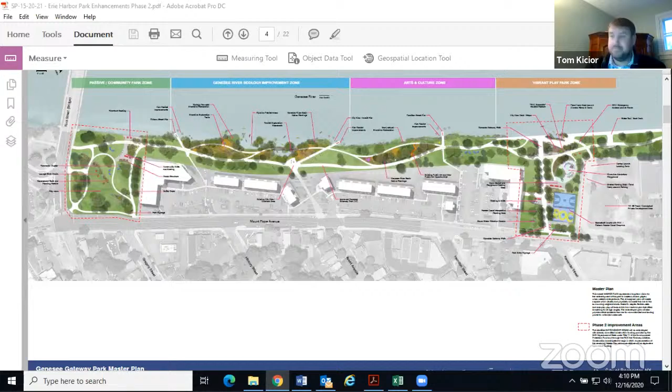So we will hand it over to Jeff to give us a background of the project, then go into questions and answers with the PRC committee. Sure, thanks Tom. The image on the screen is the master plan developed as part of phase 2. I'll step back and explain why it's phase 2. Phase 1 was completed in 2014 in conjunction with the Erie Harbor Apartments redevelopment.

The private piece of that development established 3 connections between Mount Hope Avenue and the Genesee Riverway Trail and the waterfront, basically to provide greater connectivity to the neighborhoods to the east, to the waterfront. Across from Averill Avenue is the major connection point, but there are smaller connections at Hamlin and Hickory Streets. All are public access points, open to the public.

The project also included some streetscape improvements along the frontage of Mount Hope Avenue and some public art installations. That was completed in 2014. As part of that effort, an overall master plan for the site was completed, and then the 3 connection points were established, designed and built as part of that master plan.

Phase 2 is funded by the Department of State and the ROC the Riverway Initiative. As part of our effort, our initial design task was to take another look at the master plan with fresh eyes. We've had a project advisory committee that will actually be meeting for the 6th time this afternoon at 6 o'clock.

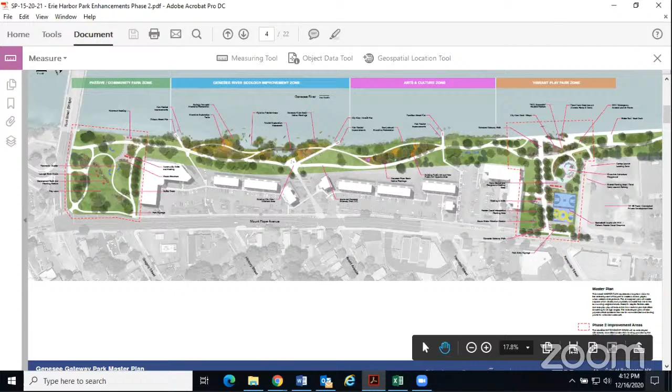The south side is largely a passive green space, kind of a transient space, not a lot of activity in it.

Our goal is to reestablish trail connections. Both this site and the northern site have had significant environmental issues that have been remediated over the years through our Department of Environmental Quality. Stantec had a part in a lot of that work through their environmental unit as well, so they had pretty good familiarity with it.

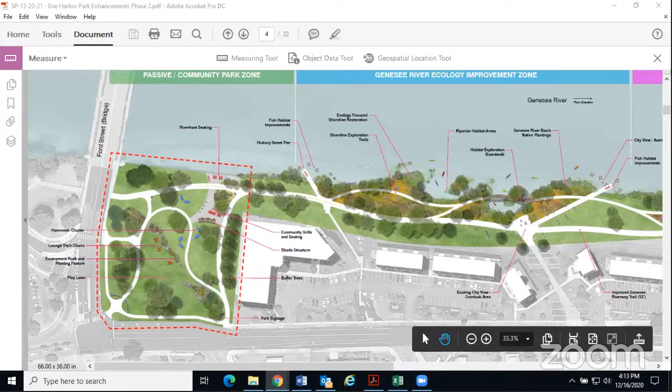Unfortunately, those environmental remediation projects often don't have restoration funds, so the sites were left in fairly rough shape, with discontinuous paths and some amenities that weren't restored. That's largely the focus of this project, to restore those 2 sites to fully functional park spaces. The south site is largely passive, reestablishing some connections that were disrupted by the environmental projects.

The path system you see, we're going to be restoring, but not doing the community grills and seating area at this time — that'll be a future phase. Same with the shade structures, but we will establish the path system, put in some benches and grills to activate the space. From what we've heard from the public, that's desired as a minimal amenity, and also doing some vegetation management — there'll be some tree removals, but mostly plantings to buffer and screen and protect some view sheds.

The rock escarpments you see winding through the site, we will not be doing at this time. It's a budget issue, and a future phase would look at addressing those kinds of things.

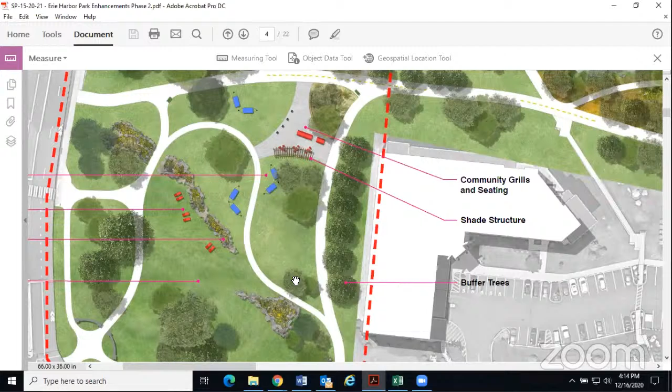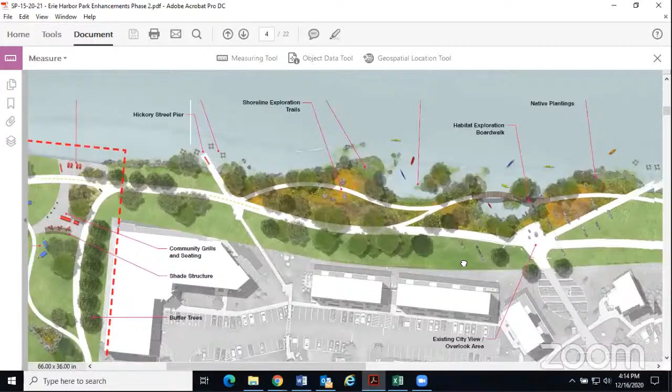The river trail we're showing here has some pretty significant changes proposed in the master plan between the north and south sites that we will not be doing. That's a long-term vision that will depend on future funding for design and construction.

Obviously the biggest piece you see there is the naturalized shoreline. It's a pretty big change, and would be a pretty significant hurdle to permit, but a lot of other communities have done it on their waterfronts. We think it's feasible and it would be a good option. The west side is doing some wall removal, not quite naturalization — they're still maintaining a wall — but it'll be interesting to see how that works out, and might lead to some direction on this naturalization here.

So Tom, if you can go to the north side.

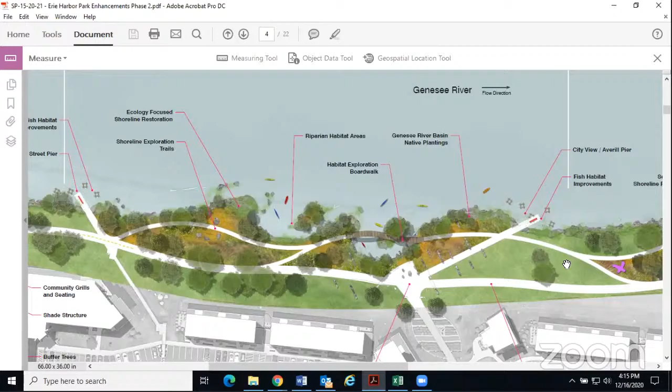The north side is largely the active area of the park, most accessible from the neighborhood. A big source of use is the Hamilton Tower directly adjacent, and this is where the majority of the active use amenities are now. There's an existing playground and basketball court that we propose to remove and replace.

We worked pretty significantly with the Southwedge and their farmers market group to make sure we have accommodations for their future and continued use of the site after construction. That central spine is basically the area where they can set up tents and tables — it's fairly wide to accommodate those uses while still allowing pedestrian access through. We also want to provide direct connectivity from Mount Hope to the river.

The playground is all new, kind of custom designed. We're still working toward feedback from the neighborhood — we'll get more of that tonight and at our final public meeting, but we're pretty close on that.

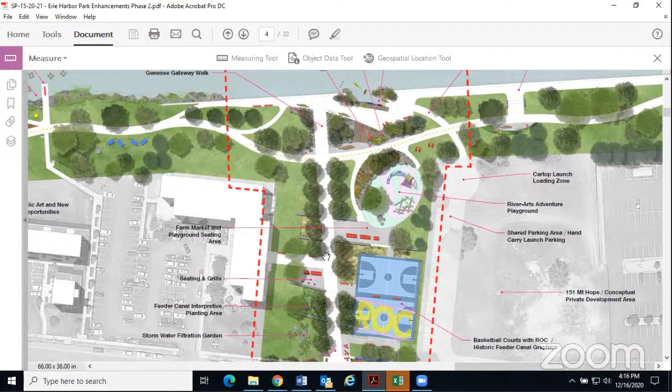The basketball courts — this plan is showing 2 courts, but we don't have funding for both in this phase, so we'll do 1 court. There'll be room for a future court later.

Along the frontage along Mount Hope, there's a sign wall and park entry signage — you can see that blue line running north-south. If you're familiar with the site, there are 3 large star-shaped concrete towers, a remnant of the 1970s design, the last time this was really updated.

Those will be coming out.

One thing we heard throughout all the public input is that people don't recognize this as public space. It kind of reads as Erie Harbor or Hamilton Tower space. So we're trying to make it more prominent that it is park space.

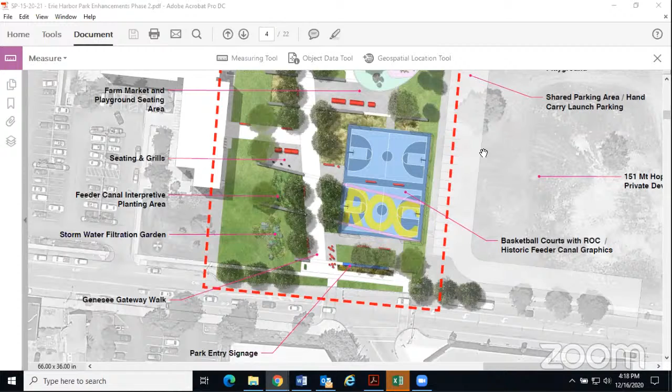Part of that is direct signage on Mount Hope Avenue to identify it as a city asset. We're also proposing some boundary markers along the length of the boundary between the park and the Erie Harbor Apartments to set the boundary, with random placement of stones and some marking piers at the entryways at the three fingers of public access, to demarcate that boundary zone.

We heard repeatedly that people really weren't comfortable stepping off the trail because they thought it was private property of the Erie Harbor Apartments. So we're trying to change that thought process and allow the full park space to be used.

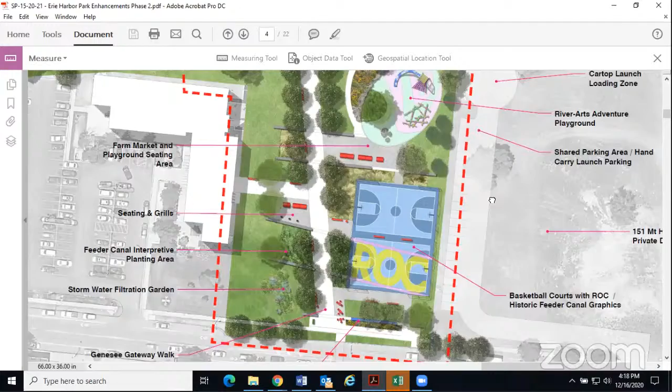The final piece, largely funded by the ROC the Riverway initiative, is the hand-carried boat launch along the river wall. When the East River Wall was rebuilt some years ago, there was a floating dock put in, but it lasted about a year before it was hammered by floating logs and debris, and hasn't been in since.

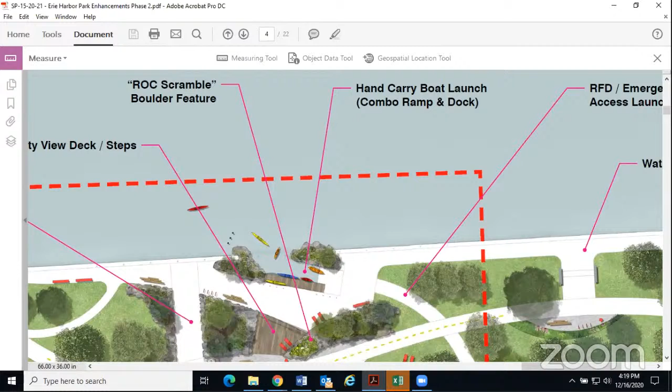So we've worked with our waterfront specialist through Stantec to design a more sustainable hand-carried boat launch that's a ramp down in. Instead of protruding into the river or putting a floating dock in the river, this cuts into the river wall and creates an embayment with a sloped ramp down, at about a 2 to 3 foot water depth.

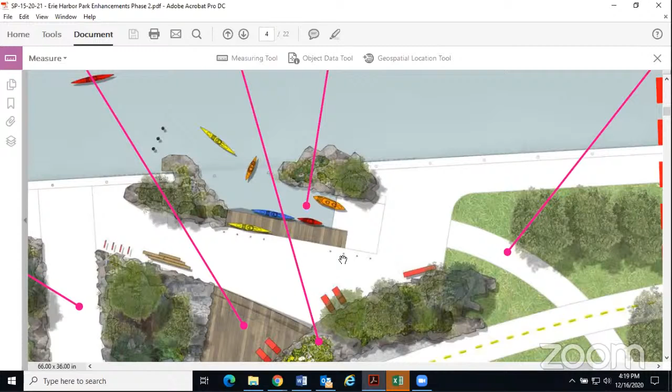So people can walk their canoes and kayaks down in. There'll also be a parallel walk space, that gray area you can see, that you could walk along. If you're more comfortable getting into your canoe off of a dock, you can do it that way, with direct access into the water.

We've also coordinated with the Rochester Fire Department. They have needs for emergency access for their trailered floating boat to get into the water, and right now they don't have access. They've told us stories about having to lower it over the wall on the west side, finding a place without trees, or going over the railing on this side.

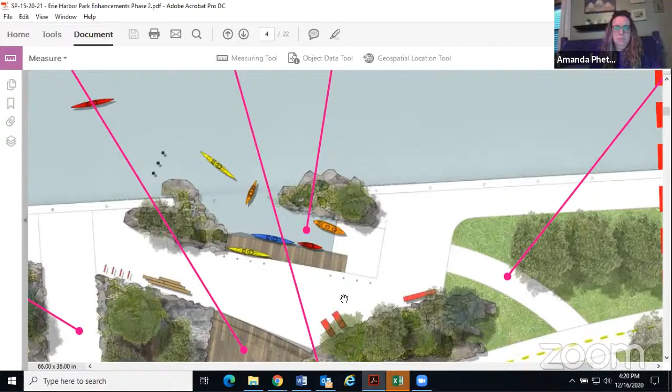So we're trying to accommodate access for them where they can back down on this trail and access this dock to launch their craft in the water. As part of ROC the Riverway, we're trying to get much more canoe and kayak access and use on this stretch of the river south of downtown, and it'll be critical to make sure we have that emergency access.

It's also good to note that'll be an ADA accessible feature as well. The area next to the launch, the gray area, is a good way for folks to launch in from an accessible standpoint if they need assistance.

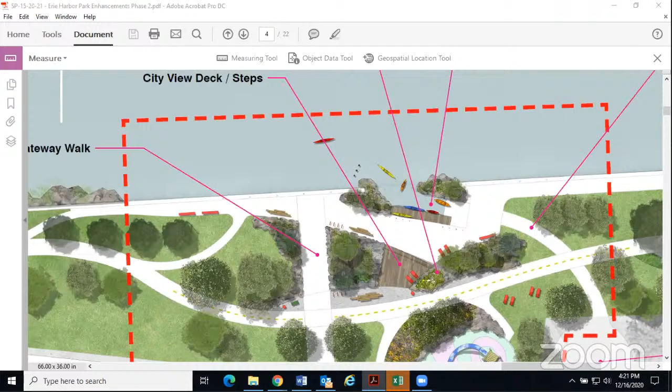The larger trail will be pretty much within the dashed area here, not touching it on the south side, but we will be rebuilding the trail in this section.

Basically along the alignment you're seeing here, with some additional amenities - trail signage, bike facilities, trash receptacles, benches, that kind of thing. There are some tree removals, but overall I think we're adding 25 trees to the overall plan, with some removals to accommodate the new improvements.

We are saving the majority of trees. There are a few relocations of trees that are in pretty good shape - we're actually going to relocate them to new locations.

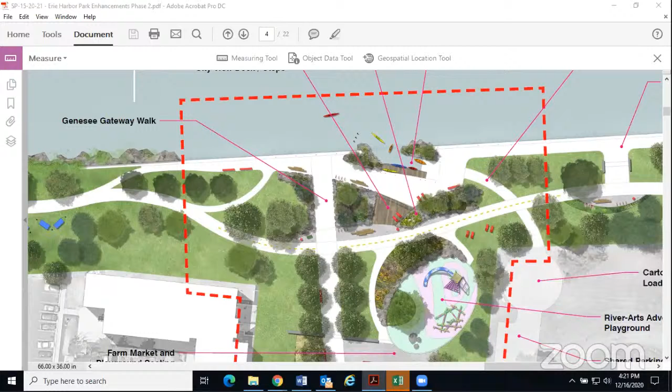As budget allows, we're hoping to do some repair of the existing river wall or river rail along this full length. We certainly won't be able to do it all, but it's at a state now where if we don't address the paint system on it now, there'll be much more major replacement costs in the future. So we're working on building that into the project to do as much as we can.

So for this group's knowledge, this project spans 2 zoning districts. It's partially open space, which is most of the river trail and the southern part of the park, and a portion of the northern part of the park is in CCD. The portions in open space are code compliant, no issues at all.

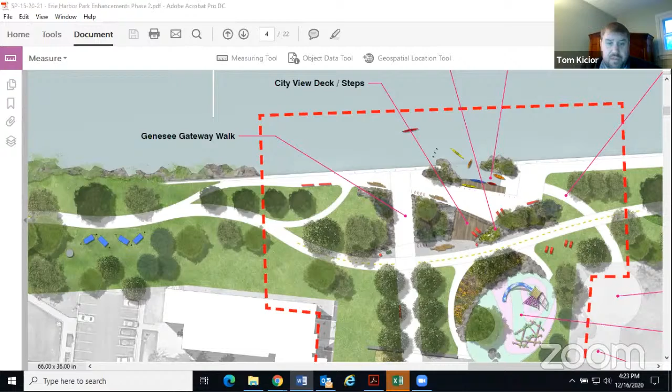The CCD portion has some code requirements related to plazas and promenades and things like that. It meets most of them, but there are 2 that it doesn't quite meet. I want to go through those 2 specifically and see what everyone thinks, and Jeff and the team can explain those. Let me pull up the code review quick here.

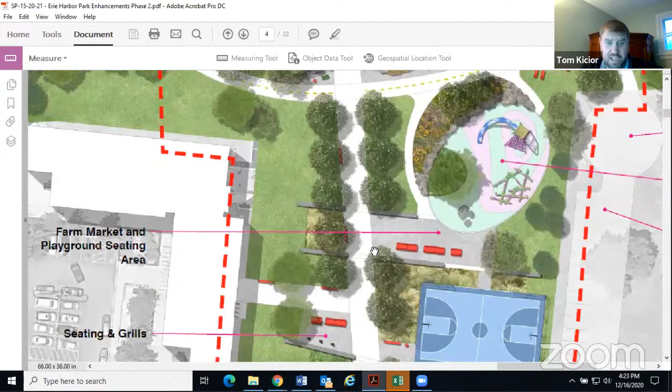The first is that the plaza shall be constructed of wood, concrete, or modular unit paving. We're generally considering the plaza to kind of be this farm market area. There's not a true plaza, so we're stretching a little bit. But I wanted them to comment on the materials they're using on the plaza and also the trail. Tom, you want to address that?

Sure. The main trail is primarily pavers. This space in the market area, we're looking at... decomposed granite or stabilized granite. Just a stabilized decomposed granite.

Which will provide for some variation in texture and really help identify that area. It'll be as durable as the pavers, if not more durable. So we were looking for a different type of material to really let that stand out. We're also using that for some of the seating areas that come off of this main gateway entrance here.

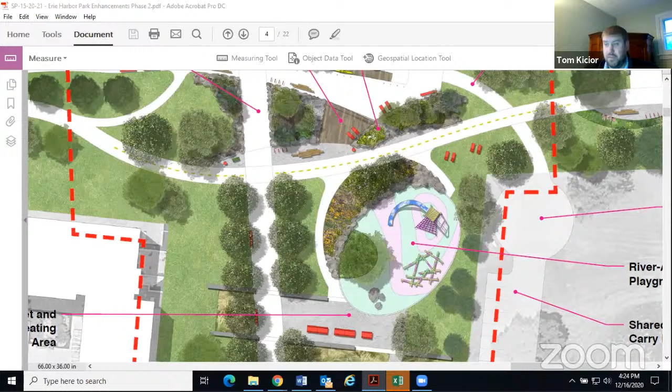And then the second one is that plazas shall be landscaped with trees that provide areas that are 50% shaded at maturity. The project is adding trees, but I think the thought is it probably wouldn't be 50%, so that was the other waiver we would want granted. So does anyone have comments on those 2 specifically? Are there concerns about the material or the amount of trees and landscaping?

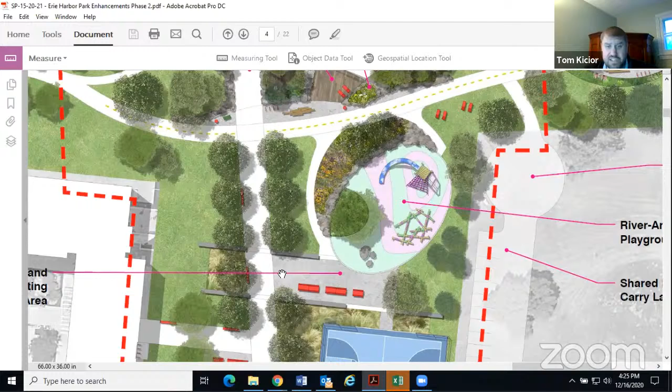I have a question. For the paver materials, it's a rough surface. How is that from a rideability standpoint? If you're in a wheelchair or pushing a stroller, is it really bumpy?

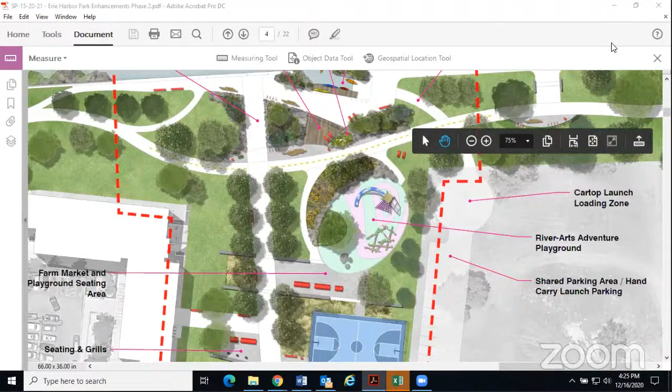Actually the plans show we had initially hoped for concrete for the width of the main access aisle through the site, from Mount Hope to the river. We're looking at doing some edging with that and then asphalt in the middle instead of concrete. It's a cost thing at this point. So you'd have a band along the edge and then asphalt in the middle.

So it's not pavers? I'm confused. There's an edge banding of pavers. Okay, Tom's pulling up... got it. So the main path then is smooth, right, for the different user groups? Yep, correct, except where the plaza areas are on the north and south sides of that main aisle, where the decomposed granite is.

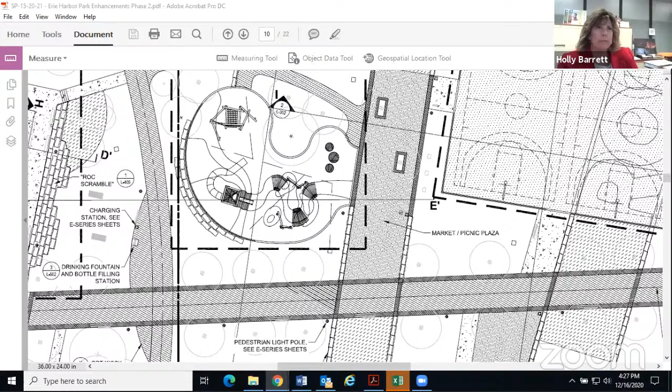Super. So other questions or comments on the project as a whole? Or I can bring up any specific drawings anyone wants to see.

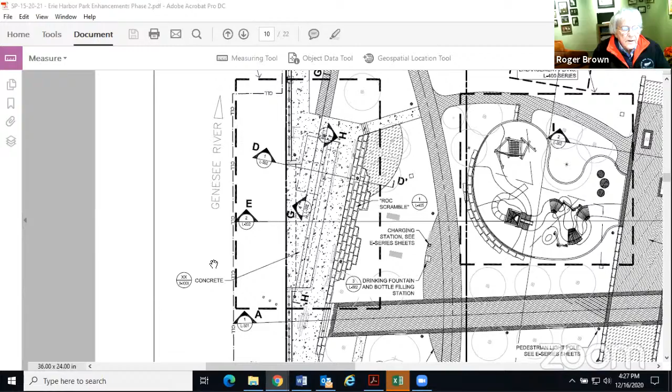I had a question or two. This trail right along here seems to be obviously a huge major piece going through the project from the river to Mount Hope. I was looking at this and trying to see—I really like, for a major feature like this, to have at the end some sort of maybe a sculptural kind of element or something that would not necessarily terminate, but provide some sort of a focal point at either end of a major trail like this.

And the other thing was, I was really curious about whether it was even considered where this crossing is—will there be a pedestrian crossing here or not?

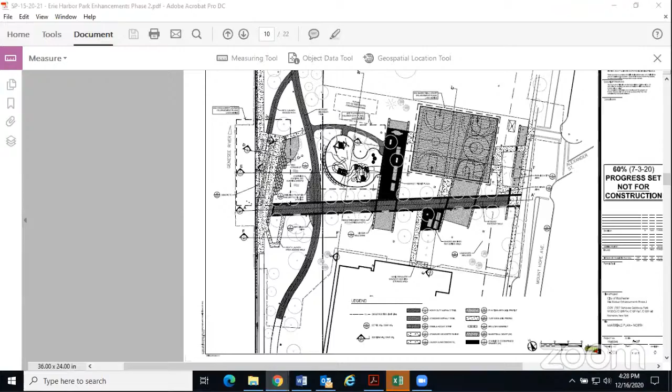There's a crosswalk on Mount Hope, right at the base. Can you see my arrow? No, we can't. Okay, all right, well right at the base, yeah, up there.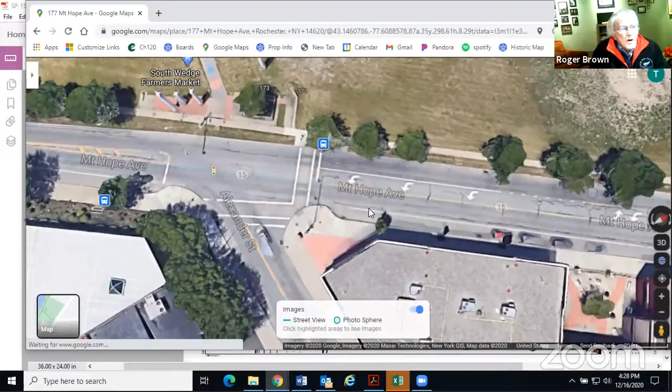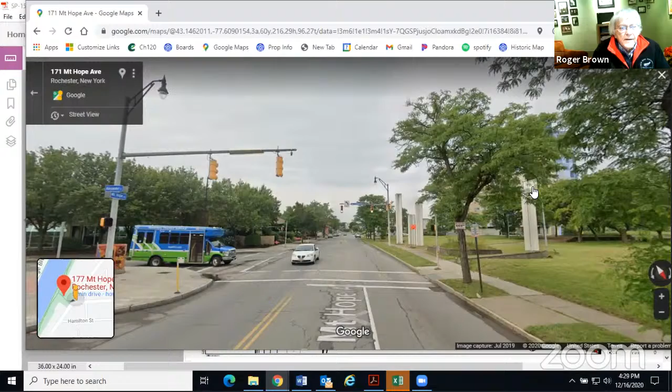At Alexander, you have a crosswalk off on the north side, and then it turns to the south for a while, and then it intersects and goes on the major trail piece that you're designing. I was wondering if it was even thought of where you would continue the line of the major walkway across Mount Hope to the southern side. Is that Alexander? Yeah, that's right.

And instead of doing that, I don't know, it just seems to be, it doesn't accentuate this major main trail. Anyway, those are a couple thoughts, a couple pieces of either sculpture or something, or a feature at the ends of that Genesee trail would be sort of neat. But that's the only question I had.

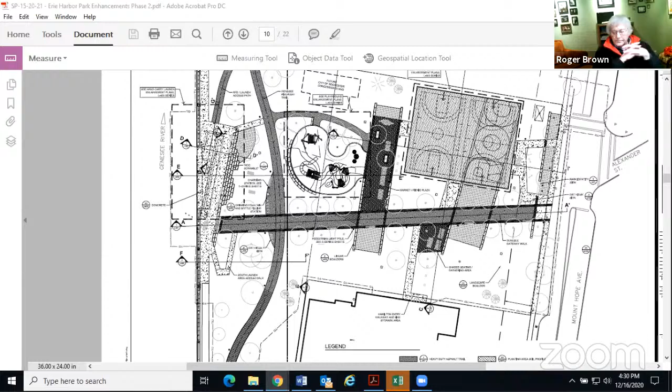Anyone else have questions? What's the width where they're going to set up the farmer's market? I can't tell, looks like it's maybe 12 feet in width. What do you say, Tom, 14? 14. Okay, yeah, as long as it's at least 12, that's fine. That's great, 14 is even better.

And then you have the plaza spaces off on the north and south sides that, if you're talking about tent setup or something like that, there's a little extra space at various points along there. Some little pull-off areas that they could do something unique with.

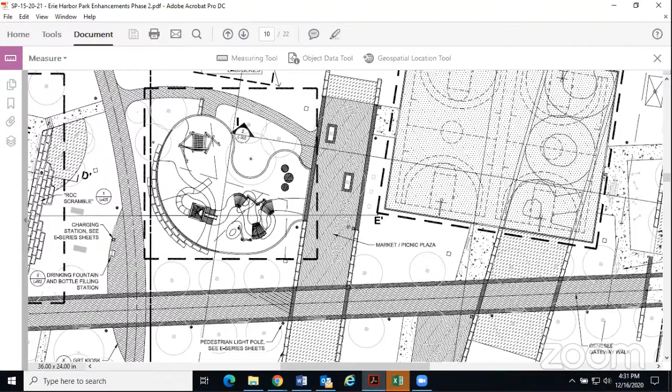Right, yeah. And for those of us who bike along here, both west side and east side, at that intersection point, when I'm moving at my extremely fast pace of about 3 miles an hour on my bike coming from the south heading toward the city, remind me, am I going to still be right along the river wall, or am I going to be up and enjoying this curvilinear piece here?

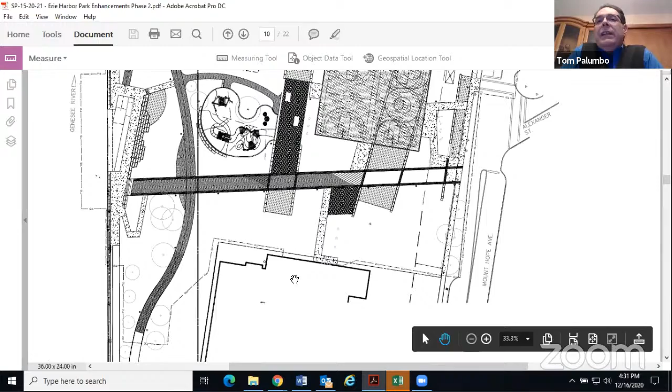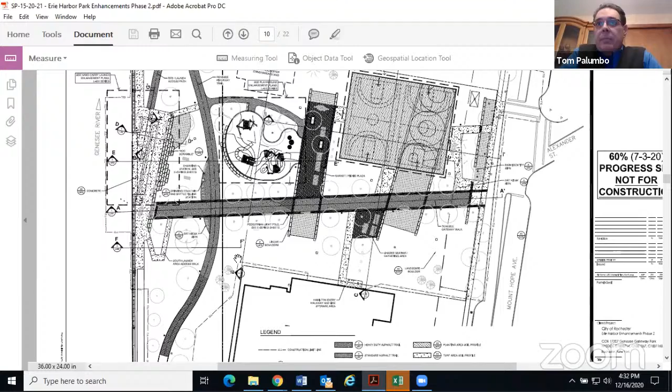I'm confused a little. You're going to be high in that section, Dave. Right now that walk goes up against the retaining wall, but we're getting rid of that retaining wall. Oh, good. So you'll have a clear view down to the launch pad, the hand carry launch area, as well as the playground and the rest of that.

Yeah, because the hope is that it's a vibrant area, kids and moms and dads and everybody are out there. But therefore there needs to be a little bit of a slowdown there, because for those of us who bike, there are those who don't go 3 miles an hour - there are those who go 8 miles an hour, and those that go 15 miles an hour. Especially with the skate park once open, will there be signage or anything? I don't mean speed bumps, but something that at least says, hey, don't go 15 miles an hour through here with the kids running all over the place. Is there any consideration for that?

We can certainly consider some signage. We do have some Genesee Riverway Trail signage in here. I think we identified kiosks at either end of this major access point. It might make sense to put some slow-down signs on the north and south approaches. I think you're certainly going to have some visual cues - you're approaching a more active area. North and south, you're pretty much just trees and trail, but as you approach this, you're going to see the major cross access point, the playground and the boat launch area. So there's going to be some visual cues existing when this is put in the ground, but it probably couldn't hurt to have some slow-down signage.

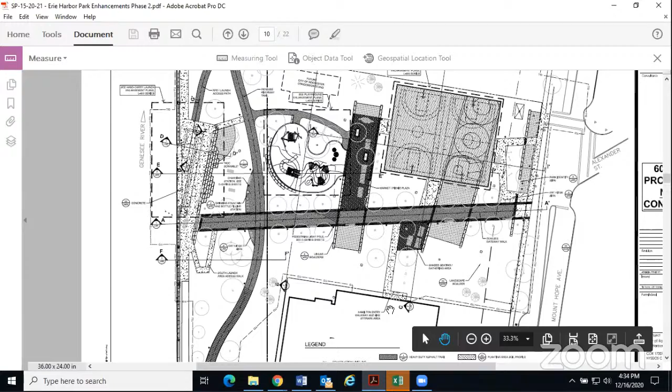I just don't want somebody to really get hit and hurt. 98% of the bikers out there are incredibly respectful and know what they're doing, but there are some, maybe 11 to 13-year-olds, who are just piling through there. And anyway, a sign may not make any difference anyway.

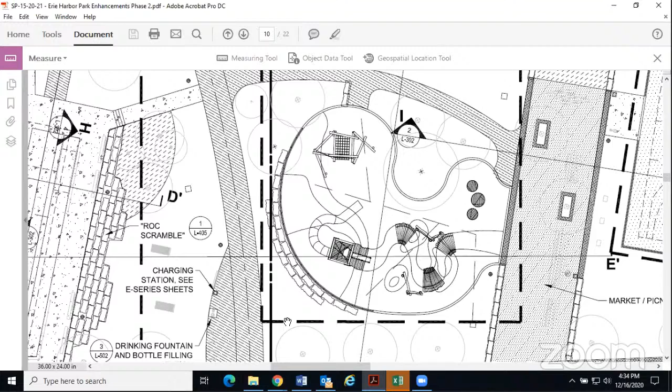What's the separation? Is this like a little wall between the playground? Yeah, there's some grade change there. So we're showing some stacked rock, and then there's actually a fence to provide more physical separation.

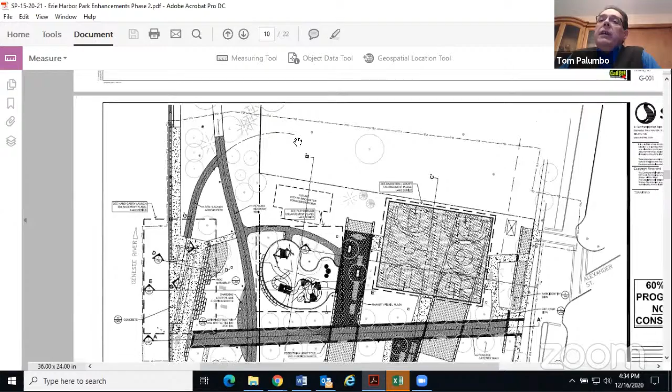We've provided an area here for a future concession stand, which would allow for future kayak rental and things of that nature, up in that corner. You can see it dashed there, which we've kind of reserved. It's within the park boundary itself.

This plan has changed slightly because we're only doing one court. So the northernmost, or westernmost court on the left side, is the court to remain. It's shifted slightly towards the main east-west path through the site. The purpose was so we have a future utility access point if that concession stand ever happens, since there's room along that northern park boundary edge to bring utilities in for that facility if and when it was to happen.

Is there any other questions? Otherwise, we could move to deliberations.

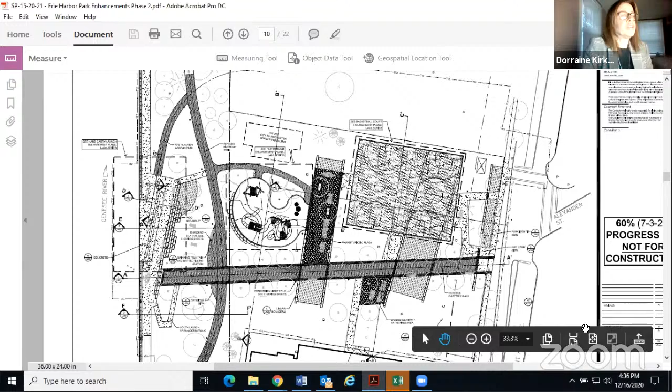I had one quick question, not really related to our purview, but you said you're only doing one basketball court rather than two. It seems like there's an economy of scale to do them at the same time. So I assume you guys looked at what a trade-off in the plan could be to get both basketball courts at the same time? Yeah, the trade-off's finding more money, unfortunately.

We're very tight on the budget right now and just trying to get the project in. We talked about whether to not do the playground, but there's huge need and huge demand for it. So that's the level of trade-off it would be.

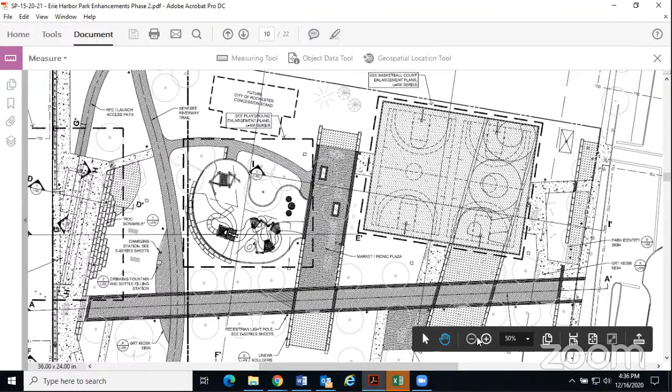Can you do an add-alt? You'd have to pay Stantec to put it on the drawings, but what we're finding is that bidding is incredibly positive and competitive right now. We're getting numbers coming in way below what we thought because so many firms are dying to get work. I'm not sure when it's going to go on the street, but you may find you can actually get it in there if you get some good numbers.

It's certainly something we can do as an add-alt. It's about $200,000, give or take, for the feature to put in the additional court, fencing, hoops, and all that. Or you could add it after the numbers come in and do a change order.

We've had a mixed bag - throughout most of COVID we had some very good pricing coming in from contractors, and more recently they've been a little higher. So hopefully we'll hit the good side of that.

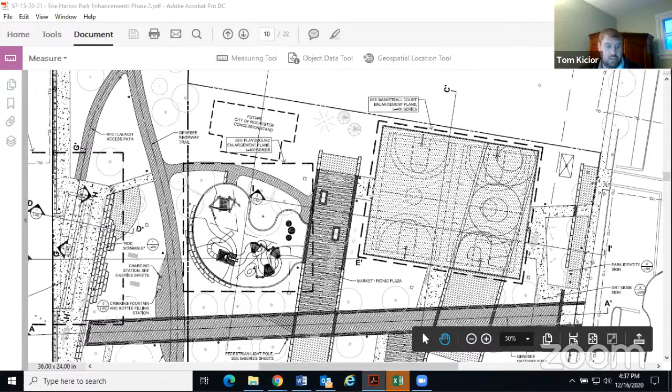So any motion or discussion? I'll make a motion that we make a recommendation to approve, with a recommendation for maybe some speed signage around the playground area.

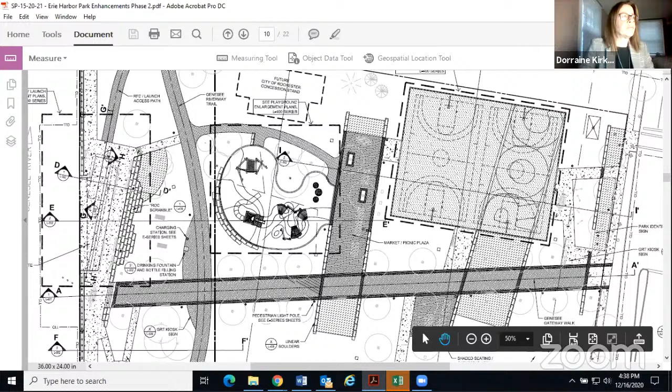Second? I second. Any discussion around those points? No, wonderful job - it's a great project.

So I will call out voting members by name, and you can vote individually. First, Holly - affirmative. Dave? Affirmative. Roger? Approve. Dorraine? Yes. Chris? Yes. And Matt? Yep.

So we are recommending approval to the manager of zoning, with the recommendation to include some sort of speed signage for the Riverway Trail. Thanks everyone for coming. I think this is a pretty exciting project, and we're all pretty excited to see how it looks when it's complete.

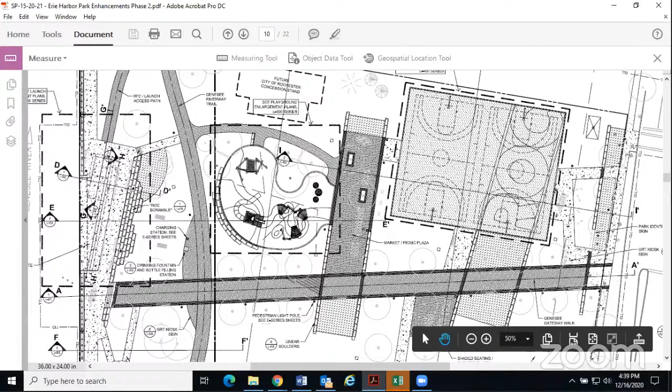So am I. Thanks for all your time. I bet. All right, thanks, thank you everybody. Bye, go rock everyone, the Riverway. Rock on, man.